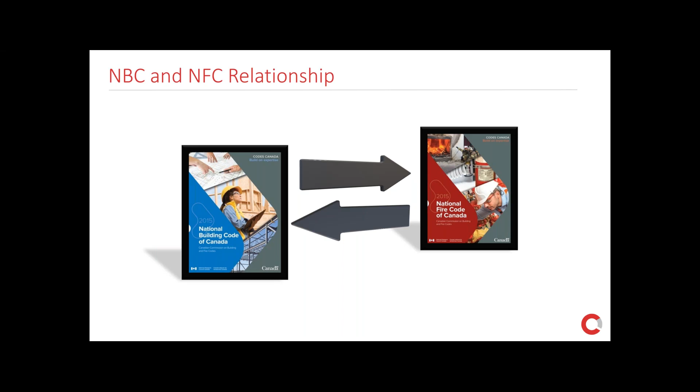between those two codes. But one important note, the NFC also prescribes requirements for existing buildings, i.e. sprinklers, that may be required in a hazardous process or retrofit for residential properties.

So how do codes relate to failures? So obviously there's a lot of questions, so many questions. So some of these typical questions. So does this building require sprinklers or other suppression system? Pretty typical. How about a fire alarm system? Was a fire separation even required? Who is responsible? So sometimes, not typically asked, but may be relevant.

So were these suites legal and did they meet code? What were the hazardous processes and did they meet code requirements? What is the code requirement for partially occupied suites? Fire at construction or demolition sites, were they required to follow a code to ensure fire safety? Interesting. These are all only some questions that have been or could potentially be asked. Each failure often requires that the fundamental code review be completed first.

Does the building require a sprinkler system? Good question. Let's start with the age of the structure and what code may have been used at the time of construction. Or maybe it's a fire code requirement to retroactively install the sprinklers. For example, flammable combustible material storage in a warehouse that may have exceeded the quantity allowed by code without a sprinkler system.

So, example of building and fire code application. So let's take a look at the application of the building and the fire code as it works together. So what do we do now? In this example, we are going to take you on a journey into the complexity of code interpretation and its usefulness. Assume that a fire occurred and spread beyond the area of fire origin. Origin and cause investigation has been completed and the cause was a result of an unattended fire that was accidentally left on. Fire damage was extensive to the restaurant and smoke propagated to other major occupancies.

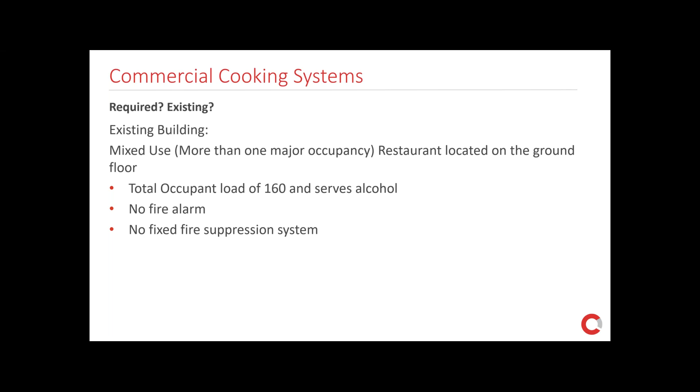So as we can see here, we have an existing building. It's a mixed use. We have more than one major occupancy, but the restaurant is located on the ground floor. The total occupant load is 160 and it serves alcohol. There's no fire alarm. There's no fixed fire suppression system. So where do I start? That's a pretty good question, right?

It's an existing building. So according to the previous slide, we have to look into the National Fire Code, right? Because it's existing. So the NFC 2015 edition is being used because it's currently regulated in multiple provinces. Okay, so some provinces might have an earlier, some might have a later. A lot of them use the NFC, at least as an adoption for that particular province or territory at this time.

So Article 2.6.1.9, Sentence 1, provides a pretty clear intent that we are to follow the National Building Code. Interesting. So the fire code is actually telling me now to follow something that's new, but it's not. But then again, remember, they work as harmonized documents together, right? So let's take a quick look at what the National Building Code has to say about commercial cooking.

So here the NBC, remember the National Building Code, Article 3.3.1.2, it's right here. So sentence 2 is always pretty clear on its intent, but yet again, it's making me look into other parts of the code. So this is a normal process within our codes, and also one that confuses many people, resulting in misinterpretation. I should have highlighted that one for you because there is a lot of misinterpretation. I'll break down each article for the purpose of this webinar.

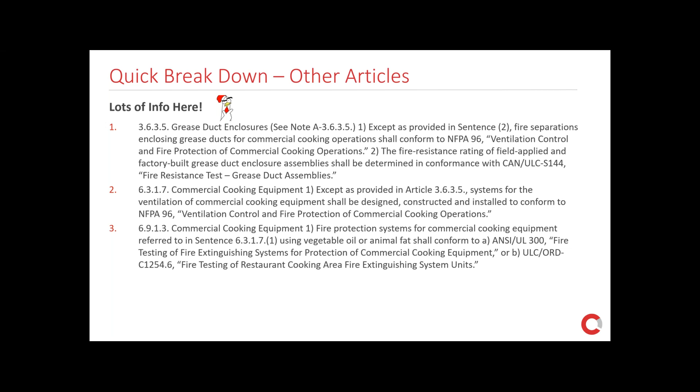So number 1 provides acceptable methods on how to install a fire separation around the exhaust duct. Pretty clear. Number 2 outlines how to install a ventilation system to NFPA 96, and we'll get into that in a minute. And number 3 requires you to use a fire extinguishing system. Very interesting.

So last step is to look at the acceptable standard as permitted by the regulation, which is NFPA 96. So here we have the National Building Code 2015 edition permits the use of NFPA 96, 2014 edition, again, depending on your province. So please note that certain provinces may already incorporate different editions of NFPA. So for instance, Alberta is NFPA 96, 2017. And Ontario still uses NFPA 2014.

So the question is, can I use a standard of an earlier edition? Well, the answer to that is no. Can I use a standard of a later edition? Maybe. If you're designing a system, then of course you can, depending on the authority having jurisdiction. So typically a newer standard may provide a clearer intent on particular articles or add content to help address specific concerns in the industry.

So for example, mobile and temporary cooking operations, i.e. the fry truck that you love to go to at lunchtime, were added to the 2017 edition of NFPA 96. So prior to that, there was really no mention of those mobile and temporary cooking operations. Many municipalities always had problems with them, but now it's being put into 96 to address it, 2017 and going forward.

So that's how these standards incorporate more of an understanding going forward, and they provide that clear intent. So just because you're regulated for older, using a newer one could provide that clear intent that a lot of those municipalities may require to have an understanding of why you're doing what you're doing, okay?

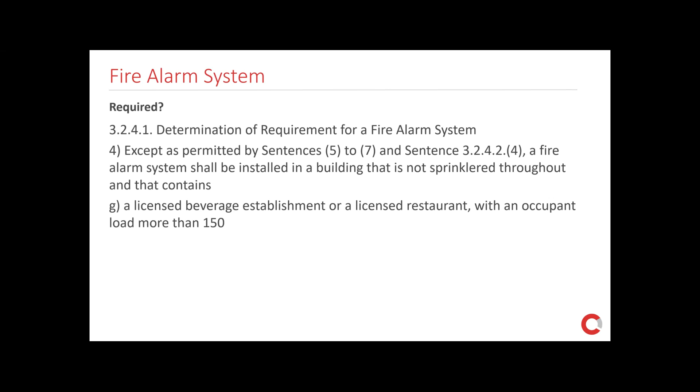Okay. In these particular cases, the answer is sometimes not easy, especially depending on what jurisdiction you're dealing with. Gathering the right info can provide answers and clarify what may or may not have been required and how the fire damage could potentially have been reduced.

So let's look at a little case study here. Okay, so this one's going to revolve around the fire protection, fixed fire protection system.

So since we discussed when a fire protection system is required in a commercial kitchen, I want to provide a little more in-depth analysis on fixed fire suppression systems. Okay, kind of makes sense since we already touched base a little bit on one already.

So the pictures depicted are from an investigation conducted at a restaurant that had a fire within the plenum and exhaust duct. Prior to the fire event, the restaurant manager had begun to start up all the appliances, as was the norm before they opened for the day. One such appliance that they were using was a tandoori oven. This tandoori oven in particular used solid fuel. So that's wood, charcoal, and such, rather than natural gas.

The solid fuel that was used was rarely emptied and never extinguished at the end of the day. So to reignite the fuel, they would add more wood and stir the smoldering contents. Remember, never extinguished, so that thing was smoldering all night. To ensure ignition, they used an igniter fluid. While they were preparing for the day, a fire occurred inside the exhaust duct. The manager immediately contacted 911 and fire crews arrived shortly thereafter.

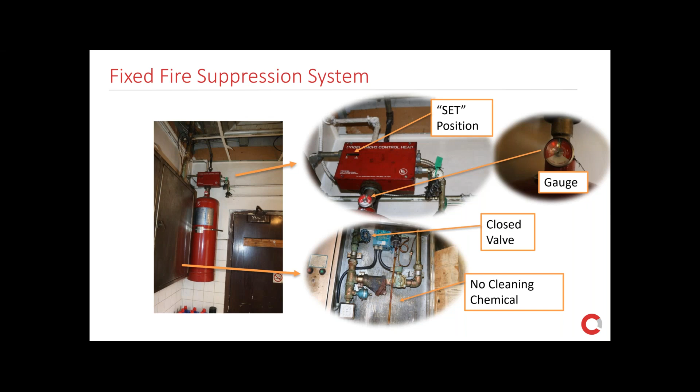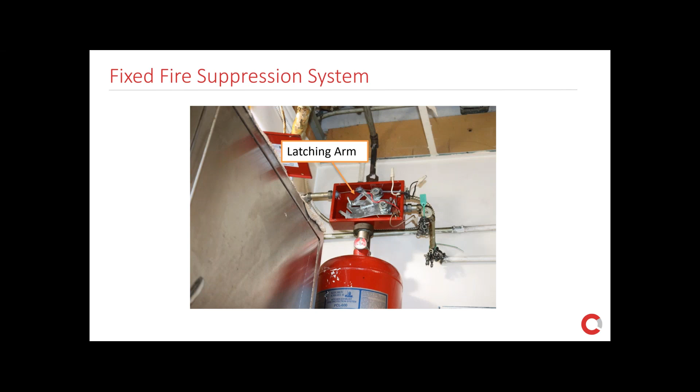So nozzles were located outside the hood, protecting most of the appliances. But by most, I mean some nozzles were missing, of course. Inside the hood, there's a space which is called the plenum. NFPA 96 requires that this space is protected along with the hazards, aka the appliances and the exhaust opening. When examining the plenum space, nozzles for the water wash were discovered, but no nozzles for the fixed fire protection system. So NFPA 96 clearly indicates that a listed water wash can be used for fire protection, but must be activated on an alarm condition.

Well, if I have no nozzles for the fixed fire protection system, it doesn't take a rocket scientist to see that, well, I got water wash, and that was shut off. Now I have a bit of a problem on my hands, right? Remember, in the prior pictures we saw wires inside the control head. Well, that's pretty interesting. Now, how about the activation? Well, this isn't an activation.

So detectors were located outside the plenum space, but how about inside somewhere? In short, a detector is required to be located at the exhaust opening. Okay, so we'll get into that in the next slide. So here you have your detector line that runs through. This ran on the outside, and we have a water wash nozzle that you can clearly see on your left. Okay.

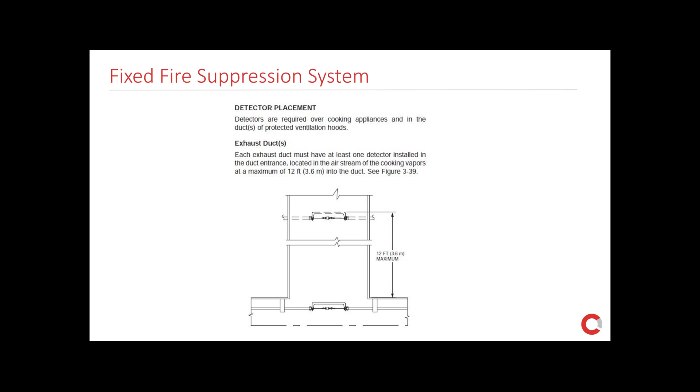So even if the system did trip and there was a detector, we still don't have an active water wash system in there, which means you get all that chemical on the outside in the appliances and still nothing on the inside. So the last thing to think about is, how did this fire happen? Well, what is common with solid fuel cooking? Pretty obvious, right? Embers being produced can ignite flammable substances. In this case, our substance was grease mixed with creosote, and a lot of it.

NFPA 96 is very strict when it comes to cooking with solid fuels, as you can see why. They have to have their own hoods and exhausts. This limits grease mixing with creosote. They need a spark arrestor. I wonder if this may have been a problem here. They need a fixed fire suppression system designed to adequately suppress the fire as well. I can tell you that all three items were not included.

On many occasions, these types of fires are preventable, and if installed and maintained, they will suppress the fire immediately, leading to minimal loss and cleanup. Most places with a properly working system will be up and running within a day. So imagine that you have a fire; in that same day, you can have a cleanup and get everything back into order and get working again.

After the examination was completed, the following is a list of deficiencies that would have prevented or at least suppressed the fire. Water wash system was shut off, and its primary design was to not only wash out grime, but also to act in conjunction with the suppression system. A lack of detector in the exhaust opening had caused the fire to go undetected, including not activating the fire suppression system. The tandoori oven installed under a hood was not designed for solid fuel cooking operations, and for lack of a listed spark arrestor to inhibit an ignition source from reaching the fuels.

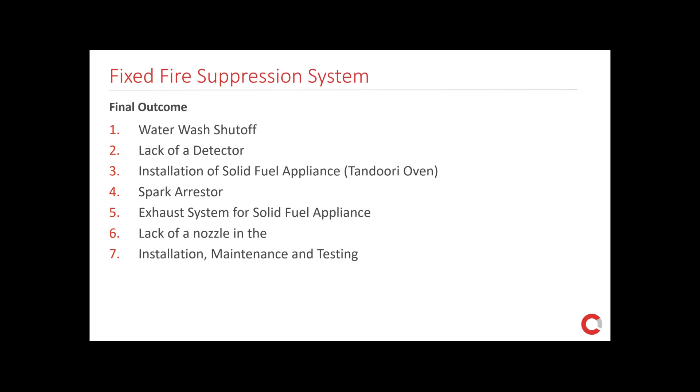And 7, owner was responsible for any installations taking place on the system, contractor responsible to ensure the system operates as intended, or provides a tag on the system that notifies the local AHJ. The responsibility for the inoperable system stems on who was responsible for what specific component leading up to the failure. So, who is responsible for code compliance? Well, owners, general contractors, developers, contractors, property managers, tenants, landlords, etc. So, all the above.

Responsible person and/or corporation: each province or territory may have their own version of this, but in the end, it all comes down to what person or corporation had control of the system leading up to the incident. How do we define owners? Well, Ontario Fire Code: unless it's specified otherwise, the owner is responsible for carrying out the provisions of the code. Ontario Building Code: owner includes, in respect to the property where construction or demolition will take place, a registered owner, lessee, or mortgagee in possession.

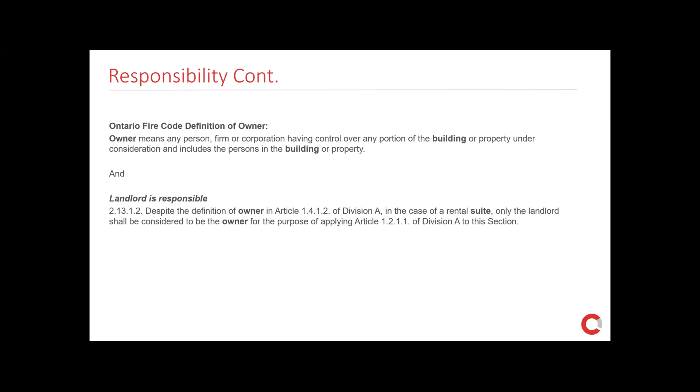What about contractors or property managers? Interesting. Contractors have care and control over the portion of the system or thing that they were hired to maintain, check, test, inspect, or install. Overall, owners are held responsible to be in conformance with the code, but as stated earlier, a responsible owner may not have had a responsible property manager, contractor, etc.

So how about the Ontario Building Code? An owner is responsible for obtaining a permit, and that includes a lessee or a mortgagee. If a contractor completes work in the building without a permit, the owner is still held liable for the work being done without a permit, but the contractor can also be held liable for commencing work without a permit. A general contractor hired by the owner can be held accountable for allowing work to commence without an approved permit. A lot of stuff here, right?

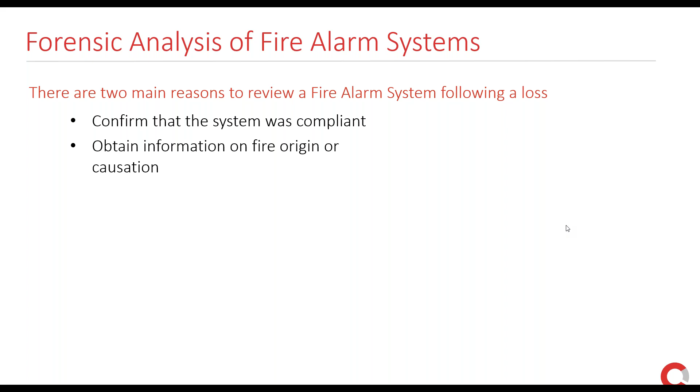A fire alarm system can also help us obtain information on fire origin and in some cases causation. So I will try to address both of these angles as we discuss the various aspects of fire alarm systems. But let's take a short step back first. We should talk about what constitutes a fire alarm system and how they're usually installed. There's a lot of material to this subject. We don't have a huge amount of time, so I will try to stay high level. If there's any questions that you want to drill down to at the end, we can do that.

But a fire alarm system is an electronic system that's installed throughout a building, designed to detect a fire condition and to notify building occupants of that condition. It is considered a life safety system in that it facilitates a building occupant's escape from a life-threatening situation.

Next main idea is detection. A fire alarm system needs devices around the building to determine that a fire condition exists. These devices can be automatic detectors, things like smoke or heat detectors, automatic sprinkler heads, which essentially are heat detectors in themselves, or manual devices like manual pull stations.

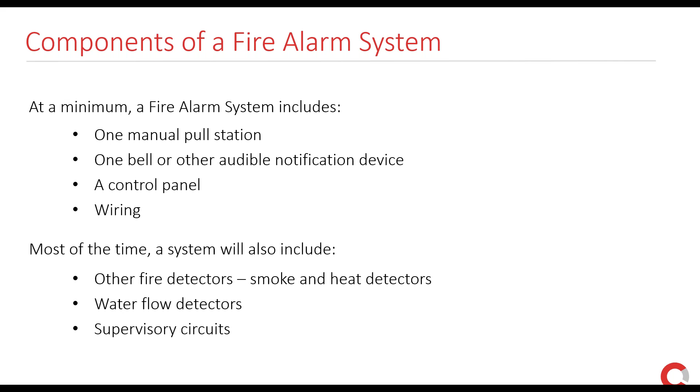So almost another component of fire alarm systems is the regulation. The fire alarm in Canada is regulated through multiple codes. Firstly, there's the building code, which mostly discusses what devices need to be in what kind of spaces. There are also ULC standards, which are referenced in the building code. But these mostly discuss how the devices should be installed and what capabilities those devices need to have. And then the Canadian Electrical Code has things to say, mostly about the wiring of the system. All three of these standards together do form the body of regulation for fire alarm systems.

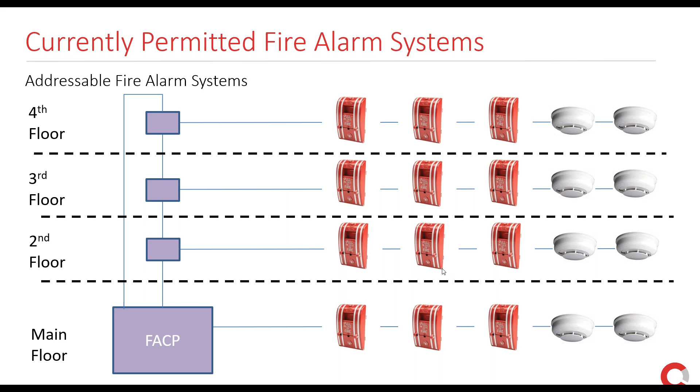But obviously, these two fire alarm systems do have very different capabilities. But it is likely that both of them are legal and compliant with the requirements in force. So some simple code research would suffice to determine what fire alarm type would be acceptable. As Clinton talked about, you do have to follow all of the threads of the code through, read every article that's referenced. You have to go through the whole process in order to make that determination.

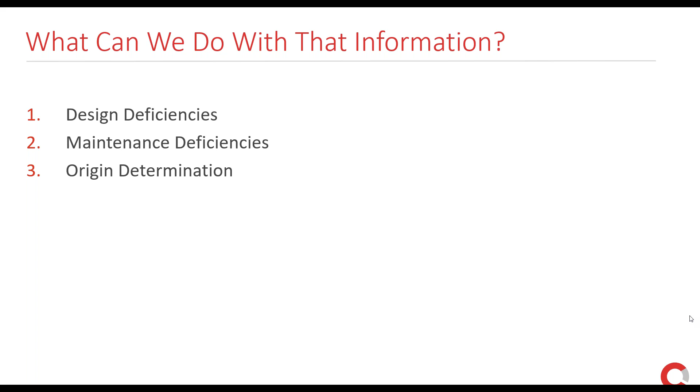Thirdly, the information gathered from an addressable system can help us with determination of fire origin, which of course can contribute to a causation determination as well. And any piece of information that helps us refine our origin and causation determinations can open other avenues of subrogation or liability defense, as the case may be.

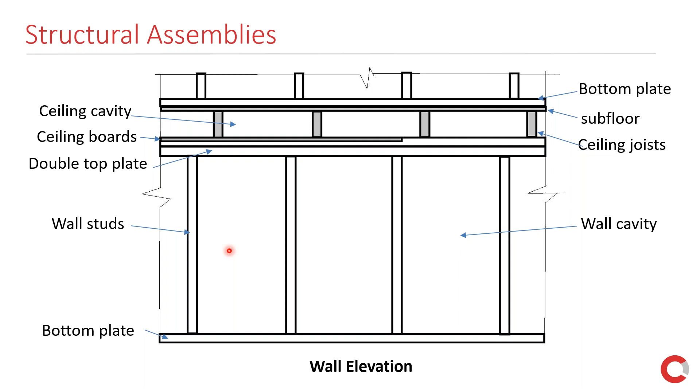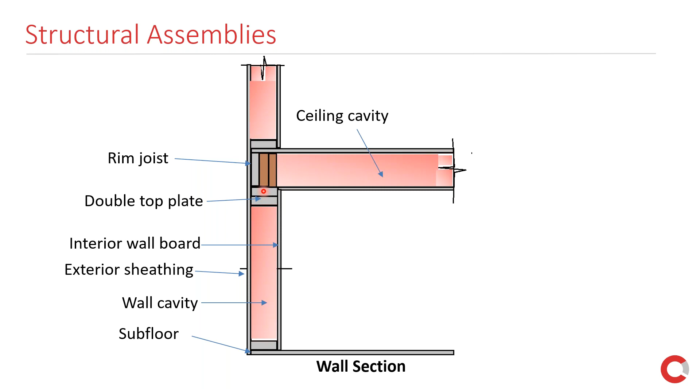So again, here a wall section at the exterior of the house. This is at the bottom plate of the wall. Here we have the studs. If you remember, they were usually spaced at 16-inch. And here, where it's shaded red, it's the cavity. Here's the floor joists and the cavity in the floor joists, and this is the wall above. And we have the top plates of the wall below and the bottom plate of the wall above.

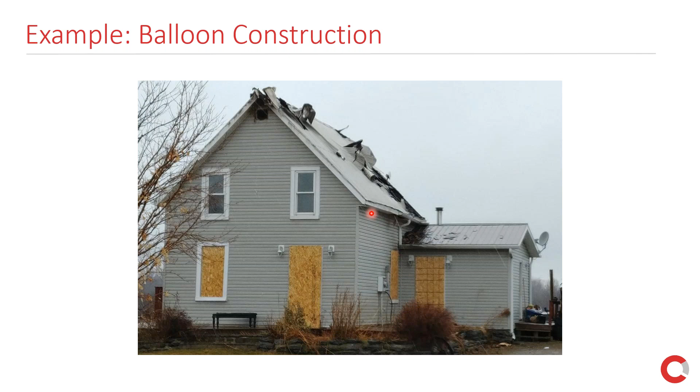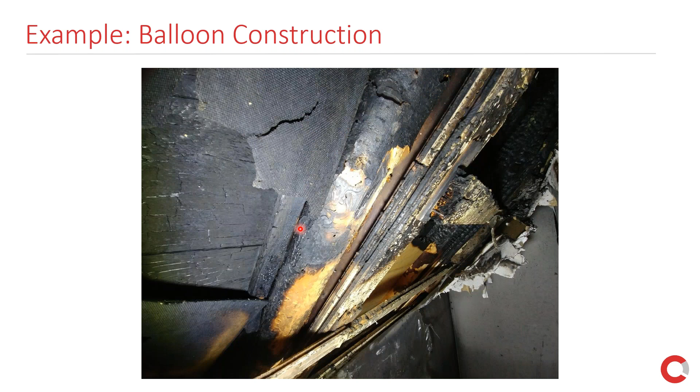And this is an example that we had. It started as a small fire in the basement, and as I said, it engulfed the entire house just because it was balloon construction, and all the wall and floor cavities were interconnected. You can see all the floor framing is charred here, and it got into the attic here, and this is inside the wall, and this is inside the attic.

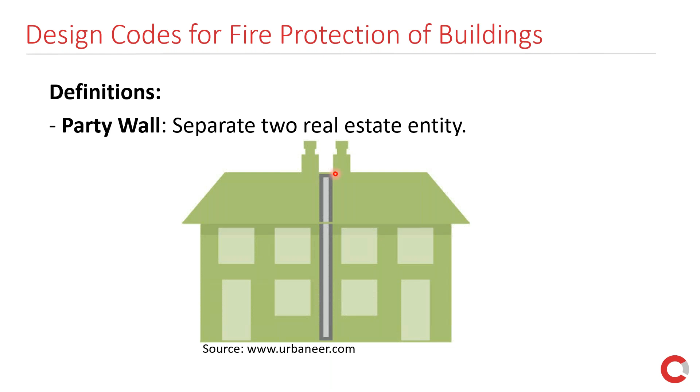So just a small fire from the basement, it consumed the whole house, and now it has to be rebuilt. You can see a general view of the fire damaged house here. Some more definitions. Party wall, it separates two real estate entities.

And fire separation, it's a wall that resists fire without collapsing for a certain amount of time, and that amount of time depends on the function of that wall. Is it between two residential suites? Is it between a residential suite and a hallway? Is it between two office spaces or commercial spaces? So the function of that wall is very important. Is it just a partition wall within one suite, in which case it doesn't need to be a fire separation.

And as you can guess, the more important the function is, the higher should be the fire resistance rating, which means it should resist the fire for a longer time. Now, firewall is a type of fire separation, and it should comply with certain conditions, and one of them is that it should not collapse if adjacent structural frames collapse under fire.

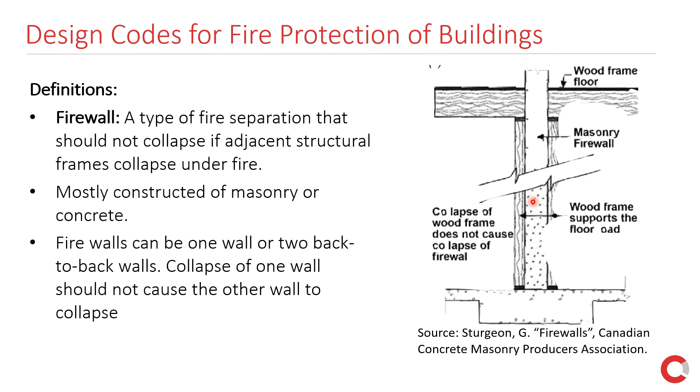For commercial and high hazard units, the firewalls must be non-combustible, but for residential units, it does not have to be, but it's mostly masonry and concrete, just commonly. Now, fire resistance rating, it's how long the structural assembly can withstand the passage of flame and transmission of heat. Usually it's between half an hour to 2 hours.

And flame spread rating is how fast flame can spread across a material compared to red oak. Usually it's between 25 to 200, and this is 25% to 200%. So 200% means it spreads 2 times as fast as it does across red oak. So the higher the number is, the faster it spreads, and it's less desirable. For red oak, of course, it's 100%.

Fire stop is the materials to fill gaps to provide the required fire resistance rating. When you have penetrations in fire separations, you need to fill that with fire stop. And fire block is material to block spread of fire in ceiling and wall cavities. As I said, you cannot have a super large amount of cavity, and they should not be interconnected. So there should be blocks to prevent spread of fire.

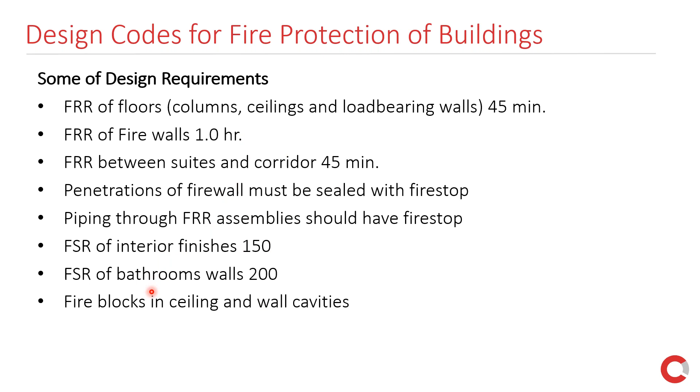And FSR of interior finishes 150, FSR of bathroom walls 200. FSR is flame spread rating, and fire blocks should be installed in ceiling and wall cavities. These are just an example of the requirements of the code for residential units. And now we are going to look at some examples here. First of all, protection of soffits.

Soffits must be protected if connected to an attic that is over multiple units. So if it's a common attic, the soffits must be protected. Now here I add that even if it's just a single family house, it's recommended to be protected. I'm going to tell you why. If you remember the section of the house here, and you have a soffit, by the code, it doesn't need to be protected if it's a single family house.

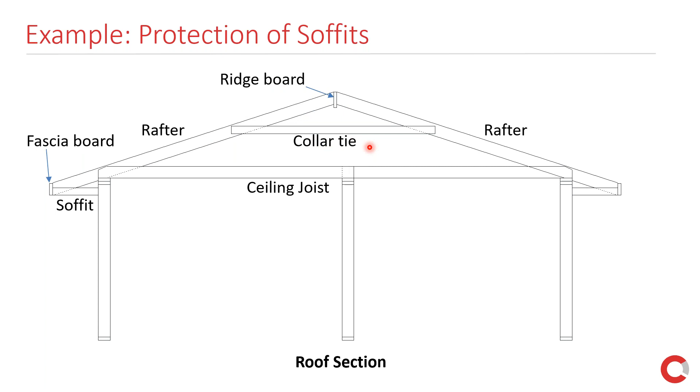In that case, what happens is if there's a fire here, from the soffit it gets into the attic, and from the attic it burns all the rafters and engulfs the entire house. And in that case, most of the time, you need to rebuild the house, or at least the top floor of the house. And we had one example like that. A large house, a split level house, and there was a small fire on the balcony, and it got into the attic.

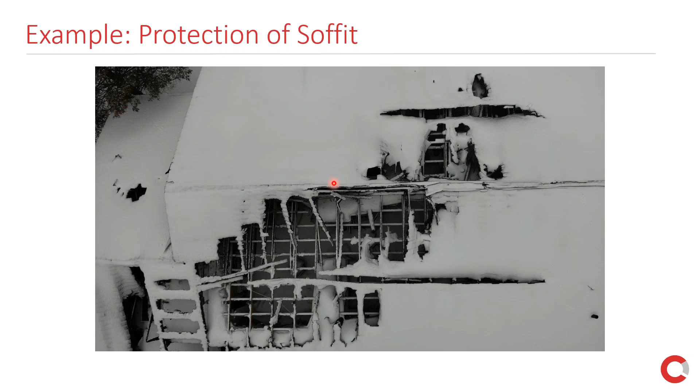Protection of balconies. So there was another fire where the fire started at the balcony of the lower level, actually the lower apartment, and from there it got to the balconies. The balconies were not protected, and the soffit was not protected. So not only did it spread to the upper apartments, but it also got into the attic, and from the attic to multiple units.

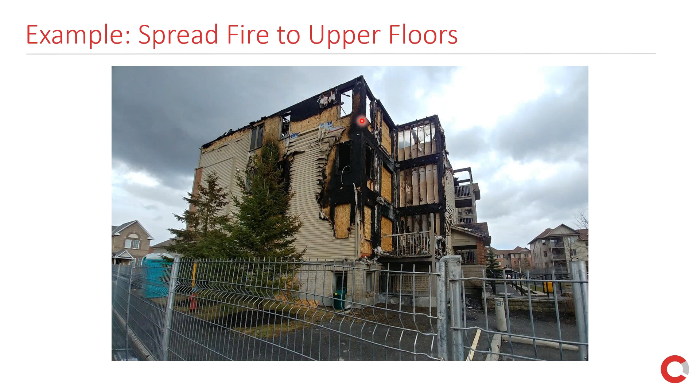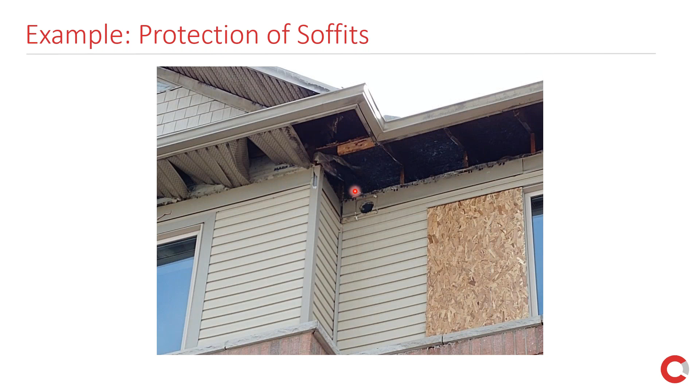Now we are in a situation where they have to rebuild at least an entire block of that apartment unit. Here is the view of the soffit, unprotected soffit.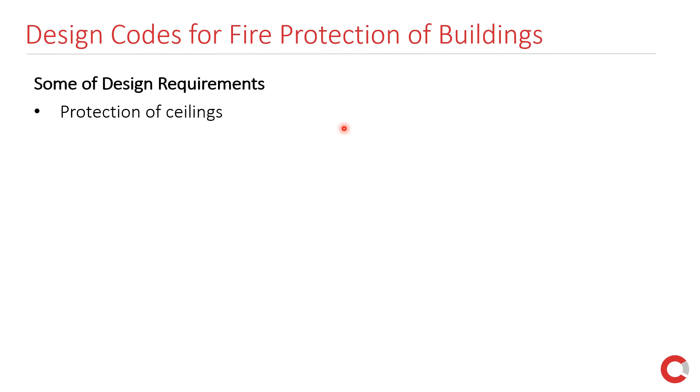Protection of ceilings. As I said, floors need to be fire separated, but it's not required for single family dwellings. And again, it is not required, but it's highly recommended. And when it comes to floors, lumbers have higher fire resistance rating compared to TJI joists. And it's because it's a 1.5 inch thick solid wood. So even in case of fire, the outer layers get burnt, and that outer scorching actually protects the inner core of the joist.

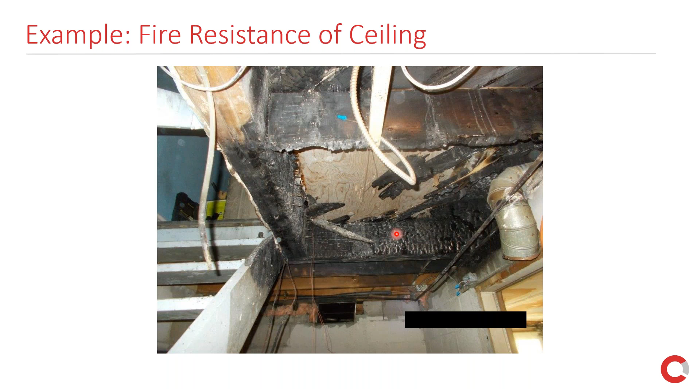So this is one example. The charred layer of the joist is actually a fire protection for the inner core of the floor joists. But when we have TJI, the web of the TJI is just a thin OSB, and it can easily burn out, and when that's burnt out, the entire floor loses its load-bearing capacity. So especially when there are TJI units in houses, we strongly recommend finishing it with gypsum boards. It's not required by the code, but it's highly recommended.

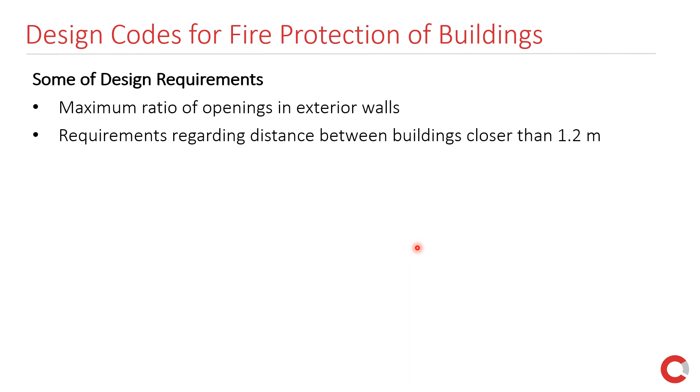And there are design requirements also for the maximum ratio of openings in exterior walls if the distance of buildings is closer than 1.2 meters. And the idea is that the fire should not spread from one house to the other.

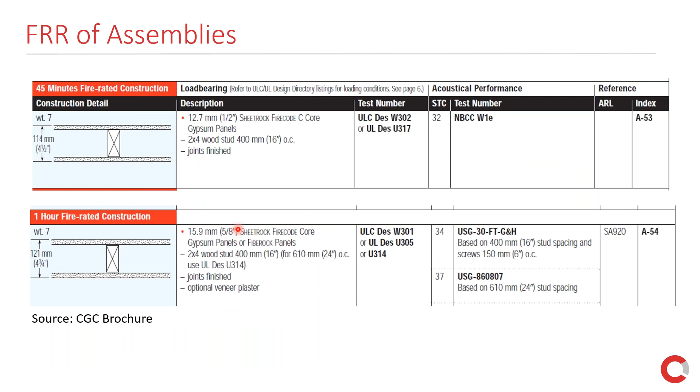And fire resistance rating of assemblies are derived from Underwriters Laboratories of Canada and tested in accordance with ULC standards, and are given in tables. So we use that to determine if the fire resistance rating of assemblies is sufficient or not. If they're not sufficient, then that would be a pre-existing condition.

So that was just one example of the tables that we use. One important thing I should mention is that the firewalls and fire separations must be continuous into the attic and into the mansard roofs. And if it's not continuous, it's a deviation from the code, and it can have very significant consequences. And for old houses, for old units, we have seen many times that they were not continuous.

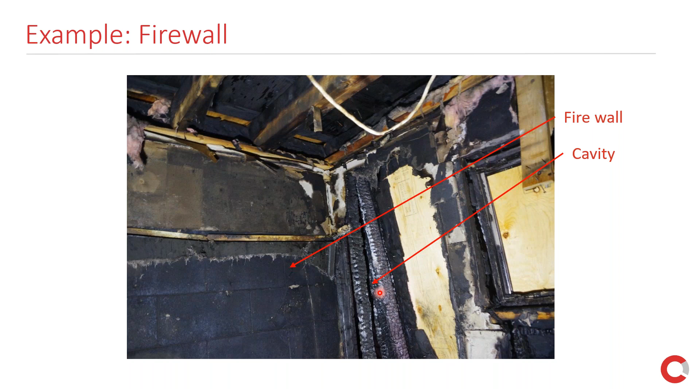And in this example, the structural drawings specified that the mansard roof must be protected by fire-rated gypsum boards, but in construction it was not complied with. So it was a pre-existing construction deficiency, and so the fire just spread. So this is a view of the firewall and the floor joists. The fire just spread through the mansard roof to the other units.

So in summary, in Ontario, Ontario Building Code 2012 must be followed. Of course, in other jurisdictions, you should follow your local building code. It's very important to protect soffits, ceilings, walls, and columns as per the requirements of the code. And it's important to make continuous fire separation as required by the building code, and seek structural inspection, especially for old buildings, because a lot of times there are construction deficiencies. Like I said before, the firewall was not continuous in our last example.

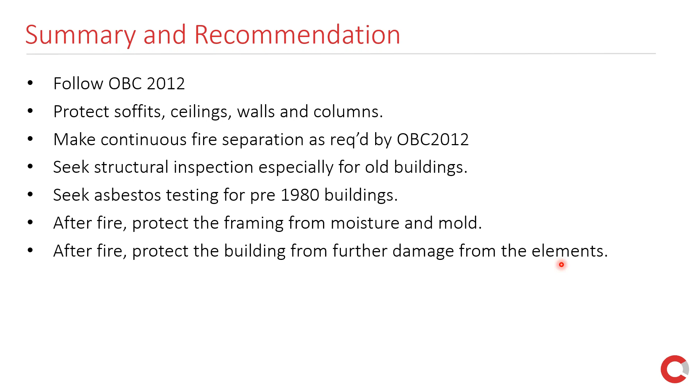So seek structural inspection for old buildings, and of course seek asbestos testing for pre-1980 buildings. It's safe to assume that buildings before the 1980s all have asbestos. I've seen workers a lot of times go into these buildings without protecting themselves. After fire, protect the framing from moisture and mold, and protect the building from further damage from the elements, from snow or ice and stuff.

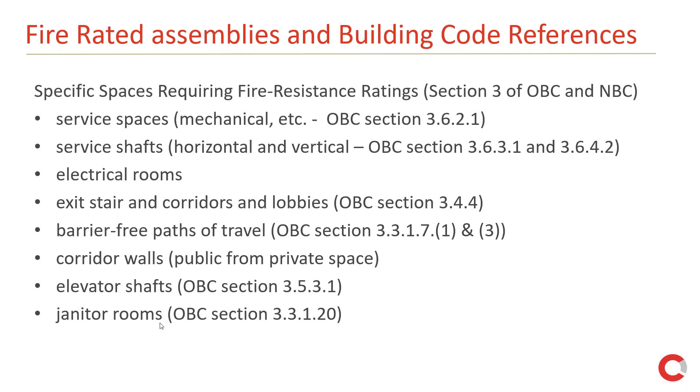So Part 3, the different sections cover things like service spaces, service shafts, electrical rooms, exits and corridors and lobbies, barrier-free paths of travel, corridor walls, elevator shafts, and janitor rooms. These are just some of the different areas of Part 3. There's other areas, but I just thought I'd highlight these.

Now remember, fire codes contain retroactive requirements that apply to all buildings, regardless of when they were built. Now, while the building code requirements only apply to construction assemblies at the time of design and construction, the fire codes are retroactive. And what that means is that the structure or building assembly must always meet the requirements set out in the fire code. Building code is only for when the building is designed or built. That's when the scrutiny is. With the fire code, it's always.

Now, this is also referred to in fire compartments and what we call compartmentalization of different areas of buildings to prevent fire and smoke spread. Now, fire separation is more specific to just describing the construction assembly that provides for fire compartments and fire separations. Now, fire damper is one of those systems in a firewall or a fire separation that accomplishes this in HVAC ducts or in wall and ceiling penetrations and closes the opening in the fire resistant assembly in case of a fire. Now, fire stop is a way of enclosing penetrations in fire separations and in firewalls and the like to make sure that the assembly is impervious to fire and smoke.

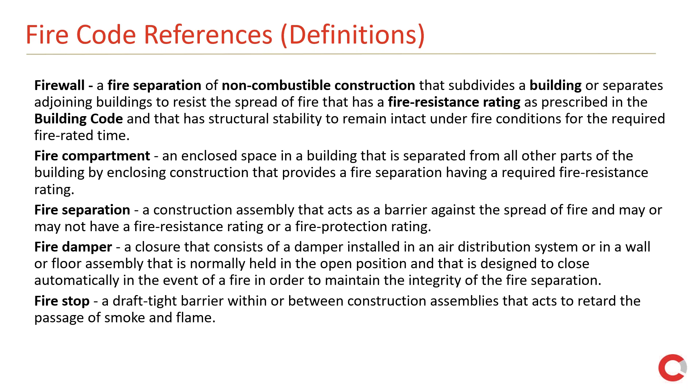Okay, so let's look at, this is section 2.2 in the fire code, and it deals with fire separation. So some of the rules, we see damaged fire separations. So this rule talks about where fire separations between rooms, corridors, shafts, and other spaces are damaged so as to affect the integrity of the fire resistance rating. The damaged fire separation shall be repaired so that the integrity of the fire separation is maintained. Now remember, fire code is retroactive, so all these fire separations must be maintained always.

Maintenance of closures. So these are all sorts of openings in fire separations, include doors, ducts, windows, pass-throughs. And again, the rule reads so that they should be maintained to ensure that they're operable at all times. And it's got a few examples: keeping fusible links and heat and smoke actuated devices undamaged and free of paint and dirt, keeping guides, bearings, stay rolls clean and lubricated, making necessary adjustments, repairs to door hardware and door accessories to ensure proper closing and latching. So that's talking about door closers and door latches, repairing or replacing inoperative parts of hold open devices and automatic releasing devices. So these are automatic door holding devices that will close in case of a fire.

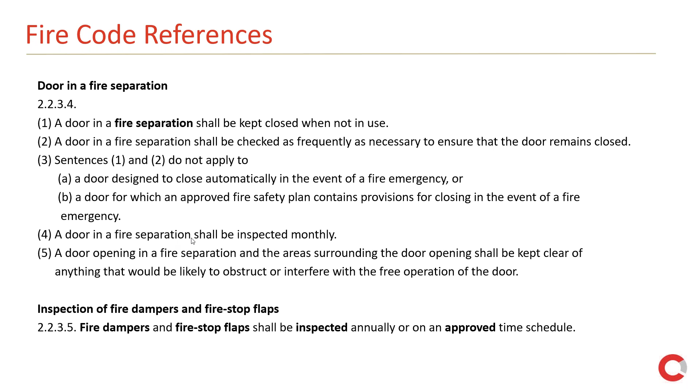Now, not only are these systems in place to reduce insurable loss, but also for life safety. In this case, the fire occurred outside of the school day, so there was actually no threat to life. It occurred in the evening, and actually this one occurred during COVID. Now, we're going to look at some of the penetrations in the firewalls, as the adjuster in this case knew that there was extensive damage that spread the fire more than it should have, and he wanted to know from us why there was so much smoke and heat damage outside the fire origin area.

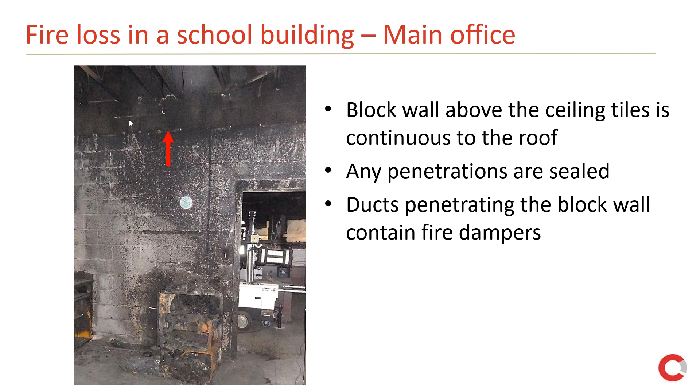Now, here's the same room. The arrow points to where the suspended ceiling was, the drop ceiling. And above the ceiling is where you have all your structural assemblies. You can see the open steel web joists. And this is actually where we find some of the issues. So what we look for is that the block wall, which is the fire separation from the office into the corridor, is continuous, and any penetrations in the block wall are sealed. Now, you can imagine ducts will penetrate the block wall. So what we look for is fire dampers in the block wall penetrations for ducts.

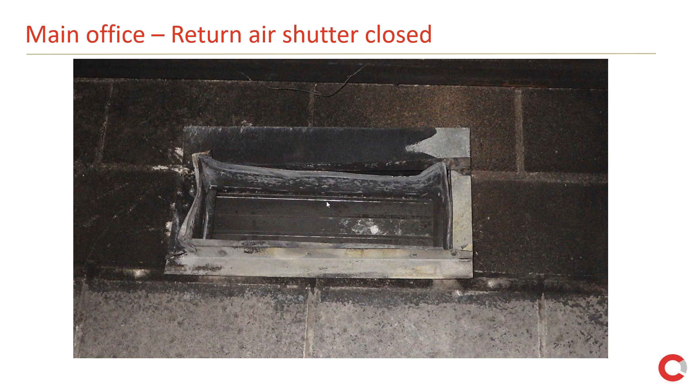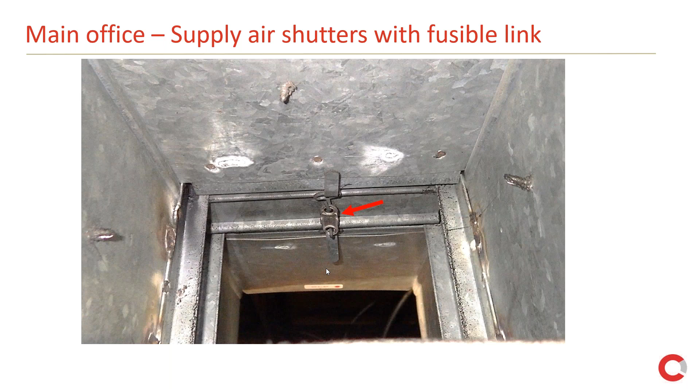So here's two similar assemblies. In this case, the shutters stayed open. You can see that the fire didn't originate in this room, but it's close to here. This is another part of the office that didn't see as much fire damage. And as a result, the heat wasn't intense enough to set off the fire dampers in these penetrations. Here's a close-up of the air shutter that remained open because the fusible link didn't see enough heat. In this case, this fusible link is set to separate exactly at 165 degrees Fahrenheit.

So here's an example of a fusible link. We have two components. You can see the separation here. They are adhered together by material, sometimes an alloy, that lets the two ends with the loops separate at a set temperature. In this case, it's 165 degrees. It is certified by a third party, in this case UL, Underwriters Laboratories, and it is approved and tested to ULC standard 33, which is the standard for safety heat responsive links for fire protection service devices. In this case, this one is to be utilized for fire dampers.

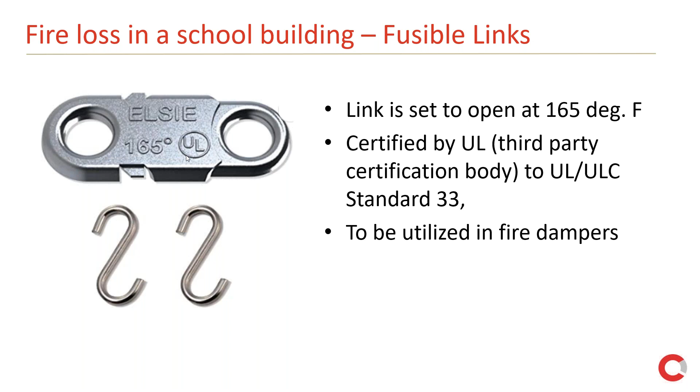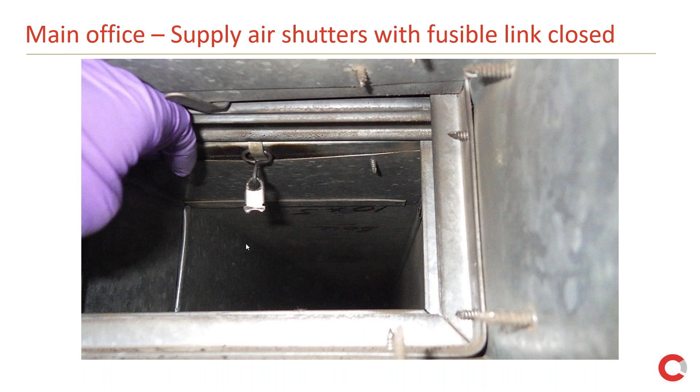It does lift up, it does operate, it closes by gravity, so it is a mechanical device. And in this case, you can see the fusible link that's separated from the other side. So similar arrangement was over here, and as the heat of the fire separates the link, the shutter closes, as you saw in the previous slide. And that goes to stopping the migration of fire, smoke, and heat through the assembly and through the HVAC ducts.

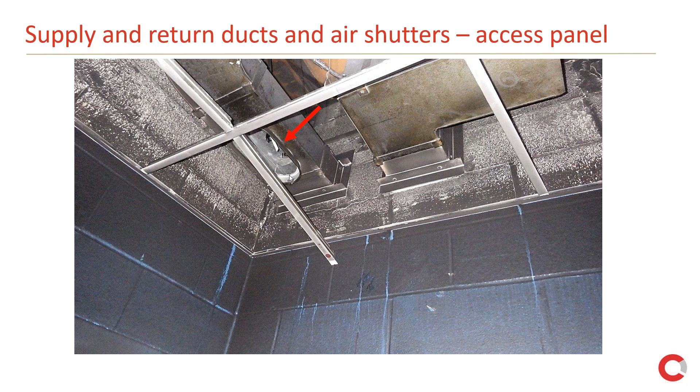Now, a proper installation for a fire damper with a fusible link will also include an access panel. So here we have an access panel in the duct. And it is a way for us to actually inspect the shutters and the fusible links. And here's a close-up of an access panel. You can see the gasket that seals the duct to make it airtight. And the access panels are required to inspect and maintain the air shutters and the fusible links, which need routine replacement.

Now, because they're under tension when installed, if they're not replaced as scheduled, there is metal creep within that fusible link that may cause them to release without any heat exposure, or they may actually change in the activation temperature and release at lower temperatures than design just from being old. So they are to be replaced on a routine basis. I believe it's a yearly replacement schedule, but depends on the occupancy.

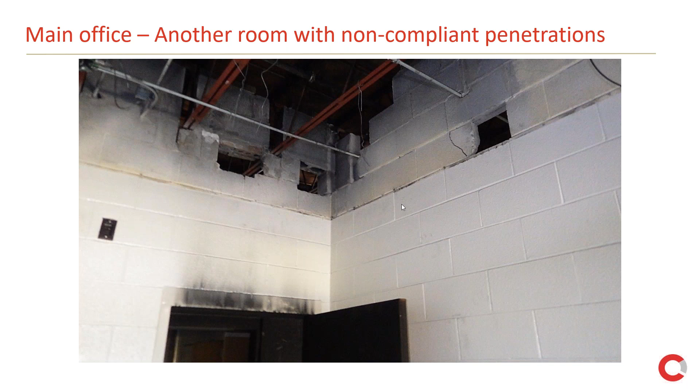Now, here's a room with non-compliant penetrations. In this case, there were probably ducts at some point in time that were removed, or during the original construction, there were plans for ducts here through the block wall, and it never materialized. Now you can see actually the firewalls are not continuous, and there's some blocks missing here again, which isn't a good thing for fire, smoke, and heat migration, should there be a fire. In this case, there was a fire.

Now, this air register had been removed some point in time before the fire, and this did cause heat migration from the office where the fire originated through the block wall and into the corridor. Now you can also see other penetrations here. You can see this pipe. You can barely make it out, but you can see that the block is actually still broken here. And electrical penetration. So here's an electrical box with some conduit. Again, the hole is much bigger.

So this is a case where fire stop material, such as intumescent caulking or even mortar, may have been used in sealing the penetrations for these. Although doing that with this bigger penetration would have made not much difference in this case.

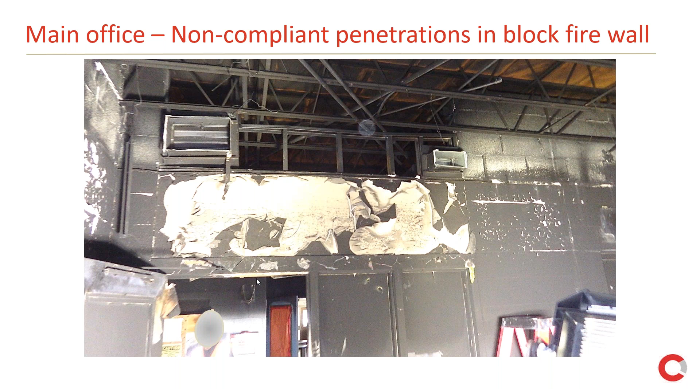Now this is looking from the other side. So this is from the corridor into the main office. So I'll go back a slide again. I'm standing out here in the second slide, looking back towards this assembly. You can see the two ducts that were in that assembly and the big opening above the suspended ceiling.

So you can see that once the T-bar ceiling went up, nobody knew any different. Nobody knew any better that there was this huge penetration, and it continued with a school within a school that was probably decades old and not fully compliant. So it's this blatant disregard of the building code and major penetrations in the block wall, which somebody disregarded, which may have resulted in loss of life or injury to life, were it to happen during the school day.

But you can also see how much it impacts the spread of smoke and soot. Look at all the smoke and soot on the walls in this case. That happened because our penetrations were not properly maintained.

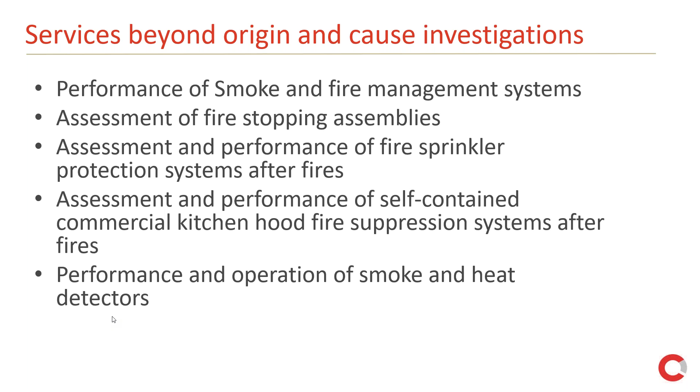So again, thank you for sitting through my presentation, and I will ask if there's any questions. Thank you, Val. Yes, we do have questions. I think we'll start with one that refers directly to the case study, since we just wrapped that up. Was the office door closed, and did it have a self-closer?

So there were several offices. I'm not sure what the questioner is asking, whether it was the main office door. In the case of the last slide, it appeared that that office door was slightly open because you saw some smoke coming out of that office door. And I can't recall if that one actually had a door closer. The other one that I showed in the first slide, it was missing at the time that I was there.

There is actually a special rule in school buildings about door closers. It's not very apparent in the fire code, but door closers are one way of closing the doors in fire separations. In schools, it's actually a written and said rule to everybody in the schools that they're supposed to always shut the doors. Not sure if that answers the question. Yeah, I think so. Great.

Here's a question around fusible links. How often do they need to be checked, who's responsible for that, and do they expire? They do expire, and I believe I said it was a yearly basis. Don't quote me on that.

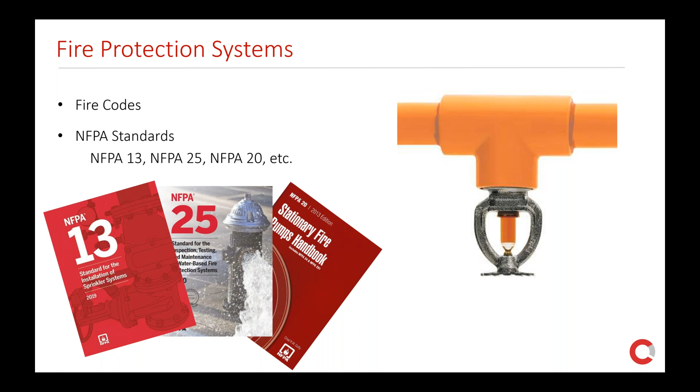So something to keep in mind when we talk about fire protection systems is that these systems or sprinkler systems are incredibly reliable. And whenever these fire protection systems are installed correctly and maintained correctly, they greatly reduce property damage. And whenever they are installed in a building, they reduce fatalities by about 90%, which is significant. And those statistics are great whenever the systems are kept up to date, because obviously the more damages, the more injuries, the more people affected, the more complex your claims are going to be, right? And usually the investigations as well.

And also remember that claims typically will result from systems that are poorly maintained, improperly designed, improperly installed. They can be abused a lot of times. And in some of the cases, there are some that have manufacturing defects, and those lead to those failures we see. Again, just to bring this all back to the spotlight, you've been hearing through this presentation that fire protection and life safety systems are pivotal in today's buildings, and that the integration of active as well as passive fire protection systems is essential for safety, for property protection, and that they must follow strict standards and codes.

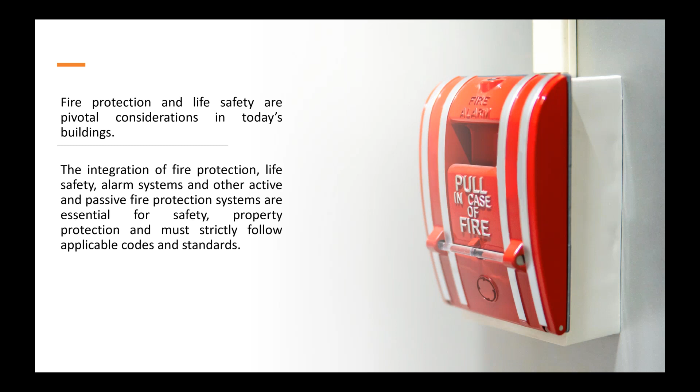In particular, the case of wet and dry sprinklers, as well as fire pumps, that's what I'm going to be focusing on today. And also looking beyond the point of origin, which will usually deliver the most results in the files that I typically handle. So whenever I have a chance to look beyond just the point of origin, or just beyond the root of the fire, then I can provide my clients with a lot more perspective and a lot more potential for their files.

So going into a little bit of detail on wet pipe and dry pipe fire sprinkler systems, I want to bring back that my colleagues presented about several other fire protection systems, and obviously the importance for life safety and property protection. But I just want to be focusing on these, which are the most common ones in buildings, residential buildings, commercial buildings.

So wet sprinkler systems and dry sprinkler systems, both of which have inherent advantages, and of course, every system has some disadvantages as well. As I was saying before, you will typically see a wet sprinkler system in your office, warehouses, apartment units, and most indoor structures. And here in Canada, because of the cold winters, we have dry systems that have to be installed in exposed areas, right? Such as parking garages, outdoor patios, and balconies.

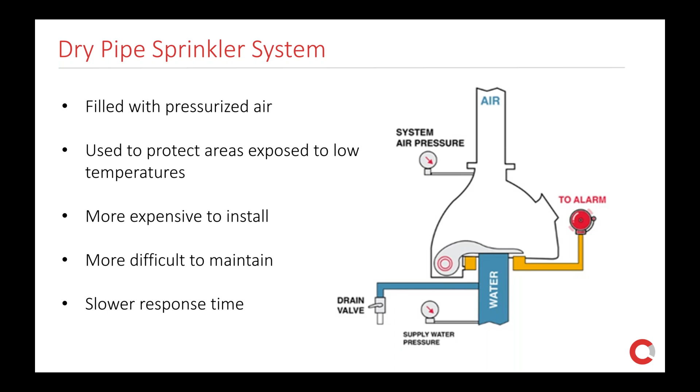Okay. Just very quickly, the anatomy of most sprinkler systems. There's the piping and different materials used, the sprinkler heads, and the pumps. I'm going to be also talking about pumps today. This is by no means an exhaustive list of components, but rather just an overview of the most likely systems or components to fail or sustain damage that lead to losses.

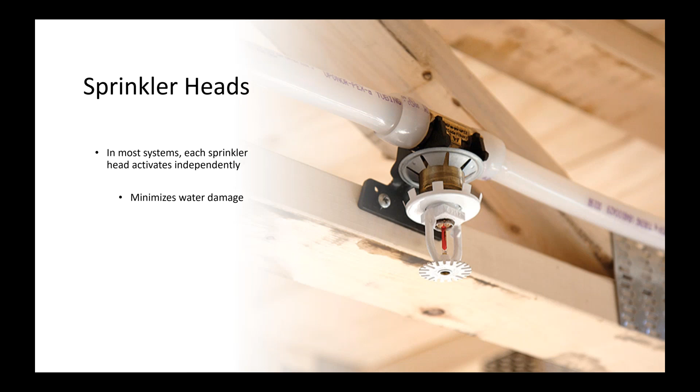Sprinkler heads, this is the most seen component in the systems, and they are activated independently, unlike in those movies where the whole floor goes off, and that helps control, contain, extinguish, or prevent the fire from spreading. Again, this is how they would look, and that water pressure concentration will help in the containment of the fire or extinguishing of the fire.

Again, for those of you who haven't had much experience with the sprinkler heads, just very quickly, there are two main types, I would say. One has a glass bulb filled with a liquid that expands with temperature and activates at a predetermined temperature. These ones are very particular whenever we look at self-activations, but these are very common nowadays and relatively very reliable. The statistics speak of one of these heads going off for no apparent reason out of every 16 million heads out there. So a very, very good track record for these systems.

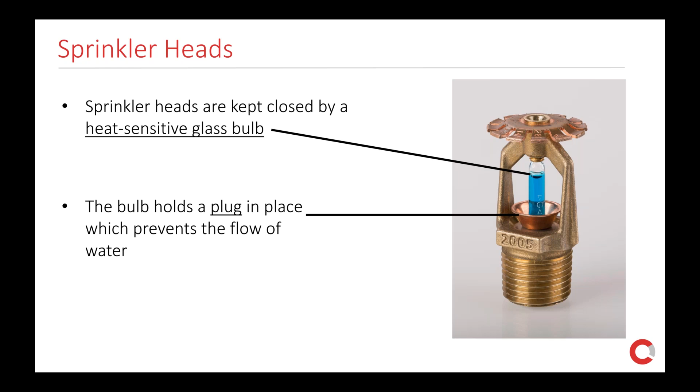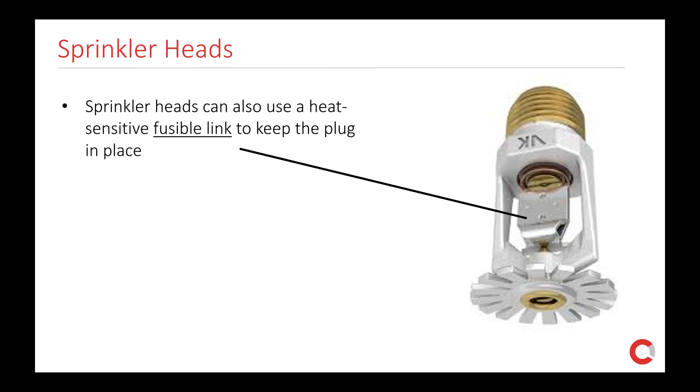The other type, as Val was saying, has more of a mechanical solder type fusible link that has an alloy holding two parts. Whenever the temperature reaches a certain point, it will release and activate. But again, let's just keep all of that in the back of our heads as we move through the presentation.

So now I'd like to go through some common causes of failures in sprinkler systems. And for that, I can mention a couple that are very interesting over the years. I've seen very interesting files, one of which includes damages caused by the occupant of the units. Obviously, we'll see cases involving improper installation, improper maintenance, and to be fair, there are a few out there that relate back to manufacturing defects. Mostly, I would say they can be addressed in recalls, but those recalls sometimes take time, as some of you may know, and obviously that time leads to other failures happening before they can be taken out of circulation.

Again, looking at occupant damages, one of the very common ones that we still see today, and we shouldn't really, is those people who hang whatever it is from the sprinkler heads in a hotel, or say in a commercial unit, there are some forklifts, some ladders, some sport equipment as well, say baseball playing in a gymnasium or in a residential setting as well.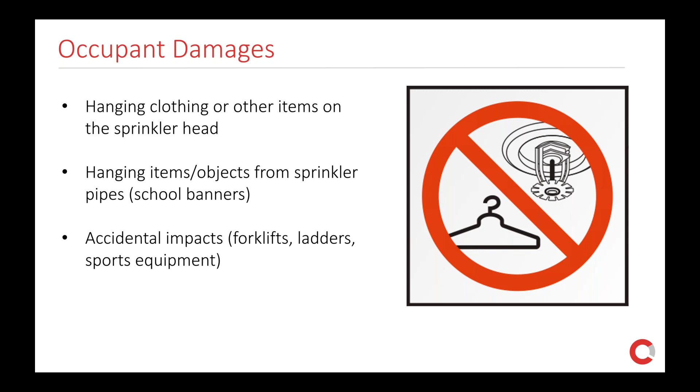And this is going to be one of my first case studies that I'm going to present. Just very short, but very interesting. It is a fire damage resulting from unattended cooking. And this is one of those where I'm sure many of you have had experience with. This is a relatively new building. It is equipped with a fire protection system, sprinkler heads throughout the unit. In this case, the unit owner left something on the stove and walked away.

I don't know how many times I've seen losses like this. I'm sure you have your stories about that. Lots for sure. And how many times have you had a good potential for subrogation out of these? I would say very few. It's typically human error. If it's not a tenant involved, then that's about it. Well, here's where not only the fire investigation for the origin and cause comes in, but the fire protection expertise comes in as well.

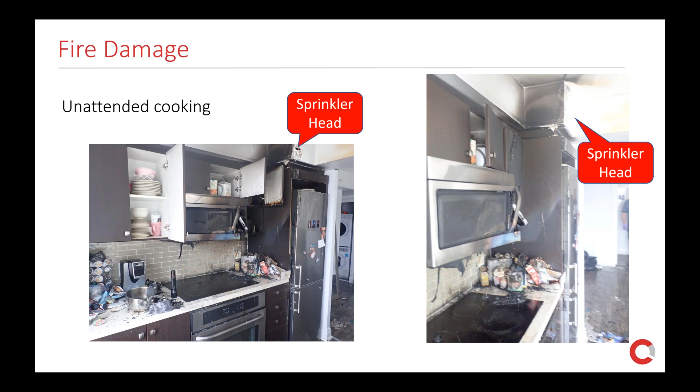And why? Well, because the spray pattern from the sprinkler head needs to be directed towards the fire. And in this case, it was clearly not the case. The fire had time to develop, and it caused much more damage than it should have. So working on this file, it was my opinion that the fire damage would have been lesser had the installation of the sprinkler head followed the requirements in the standard. Obviously, we have to remember that we are not able to prevent the fire. The fire was going to happen anyways, and some damage would have resulted from it.

So in the end, my client was successful in recovering from the builder and from the installer, I believe at least around 50% of the damages. That's what the settlement came up to. So from a zero recovery potential to 50%, that wasn't too bad, I think.

Okay, quickly moving on to some of the other issues, like improper installation of CPVC piping. And remember, I was saying before that CPVC or plastic pipe in fire protection systems is becoming more and more abundant in newer construction. And that's obviously because it's easier to install, is less expensive, and it can be repaired easier as well. But it also comes with its own risks. And one of those very common is that the joints are not properly made, and obviously some other more complicated issues that I'm going to be looking at in a little more detail in a couple of slides.

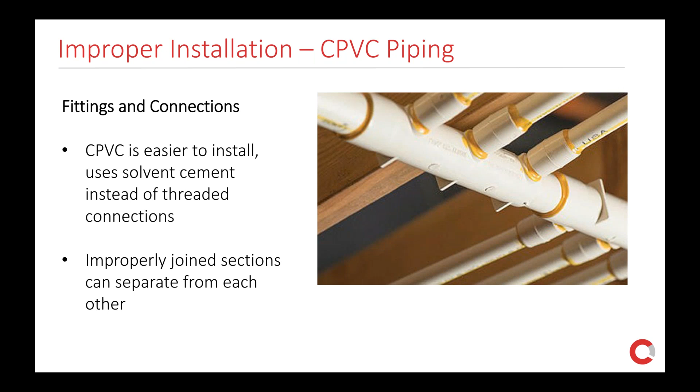So just a parenthesis here: many clients ask me if they can ship the evidence to me. And I usually want to attend the scene, of course, because I'm able to document everything I need. But I also understand that in a small number of cases and under the right conditions, it is possible to complete the investigation when you ship the evidence.

Now, this one in particular is a good example of a file where the client wanted to ship the evidence, thinking this had to do with freezing, and it was an easy situation for them to deal with and cover and move on. Now, I come along and I know that attending the site would yield the right information to process this evidence, to process this site, to better understand the failure.

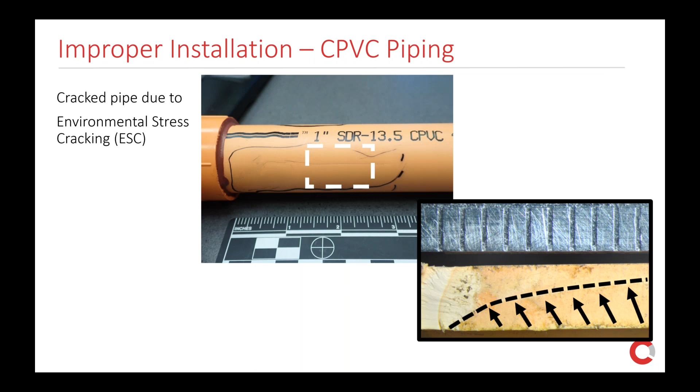So there's also the case of the wrong heads in the wrong place. And again, this does not happen too often, but when it does, there are consequences. In particular, when a lower temperature head is in a hot place, such as a restaurant kitchen, there is a high chance of it activating in the absence of a fire. Remember, the head is rated for, say, 155 Fahrenheit. There are heads rated for 265 and higher as well.

But most importantly, if a head of a higher temperature is installed in a place where it should have been a lower temperature, now we're not only causing potential for water damage, but we're also entering into the possibility of creating injuries or fatalities because the system did not activate when it was supposed to. And whenever I come in contact with a case like this, I always look at whether the space, this unit, had been repurposed.

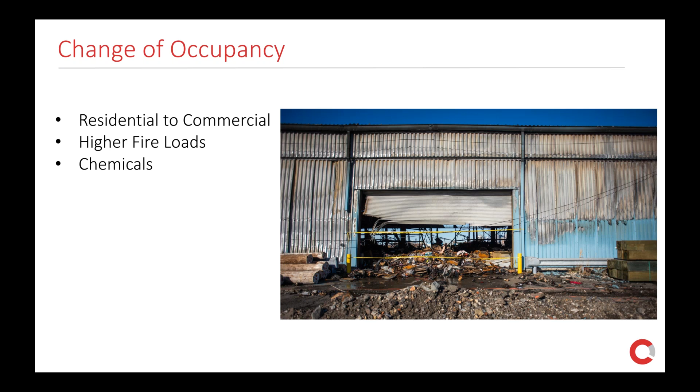Another case involving change of occupancy. In this case, it involved carpets that were stored all the way to the ceiling in this facility. And again, this is a prime example of a warehouse that was initially meant to hold a smaller fire load and was leased to someone who changed the occupancy without making the appropriate changes to the fire protection systems.

As some of my colleagues say, well, there is a responsibility for the owner, but also the code refers to the lessee, or the person or company leasing the property in this case, right? They should also be following the procedures. But unfortunately, some of the owners don't get away so easily because they have the ability to conduct some inspections every so often, and in many cases they don't, and things like this happen or can happen.

Just to finalize on wet and dry sprinkler systems, when you receive a sprinkler system claim, a couple of important things are to document the scene thoroughly. Remember that repairs to a sprinkler system usually happen immediately, either same day or the next day, because nobody wants to have the system down and a fire happen. And so don't wait until the next day. Just obtain as much information as you can. Start by asking about inspection, maintenance records, and whatever else you can.

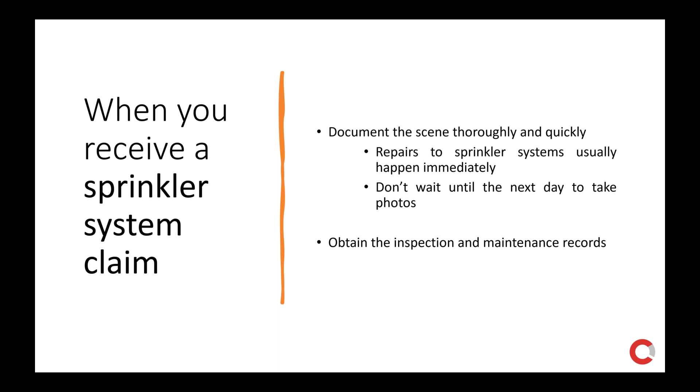So moving on to fire pumps, and this is a very fascinating topic, because there's not a lot of people who completely understand the many different aspects of fire pump systems in fire protection. And a few of the important components are electric pumps, diesel pumps, jockey pumps, and obviously the other ancillary equipment that helps all of the above operate properly. And again, this is not an exclusive list, but it's just a general overview of what I'm going to be talking about today.

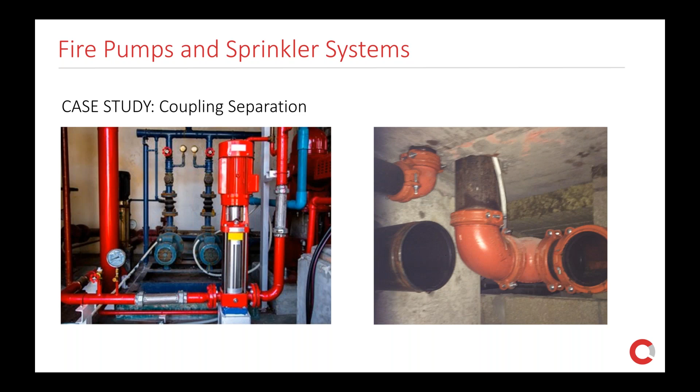So again, as you can see, understanding the fire protection systems, their failure mechanisms, and the standards, the codes, and the best practices gives you a huge advantage when investigating these claims, and it opens a number of potential opportunities when it comes time for you to think about dealing with your claim and subrogation matters.

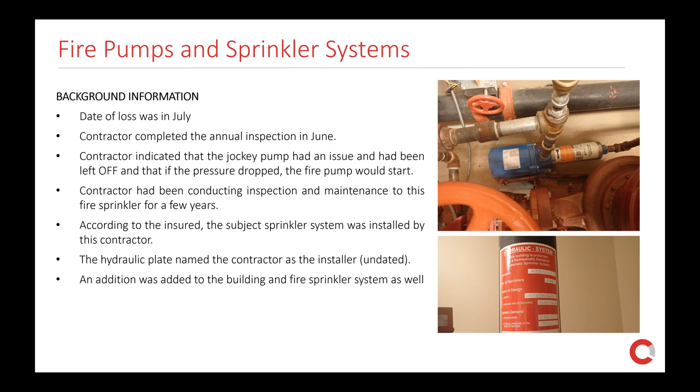And well, the activation of the fire pump in normal circumstances would not be so critical, except, well, in this facility, it was less than acceptable. Well, we know the failure. The failure is the hose separated. We know the root cause, and the root cause is that this hose was not intended, or in our opinion, it was not intended for it.

And we know that this province uses the National Fire Code, and in turn, it refers back to the NFPA standards. So we know the route we need to follow to prove this case. And in this particular one, the standard applicable is NFPA 20. And again, not only applicable at the time of the loss, but at the time of installation, at the time of maintenance. And in this case, it does say that provisions shall be made for this piping or this valve to discharge to a drain.

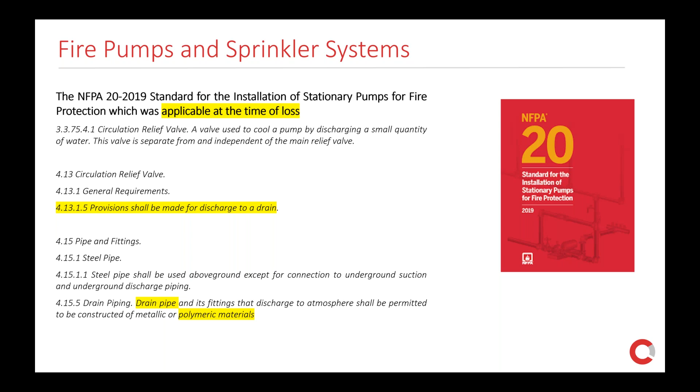Not much detail there, right? A little bit grayish. Then on drain piping, it says that the drain pipe and all its fittings can be metallic or polymer. So we have a little bit of an issue here, right? So maybe that polymeric hose was proper after all. Let's keep digging a little bit.

And we go back to the NFPA 25, which is the standard that governs inspection, testing, and maintenance of these systems. And it tells us that a no-flow test should be done every month in this case, and an annual flow test every year. So we know that this contractor who was doing work there for a few years would have been there at least once a month, and once a month they would have seen this hose moving, because whenever you turn on the pump, the pressure makes it move, and you will see it for sure. It's not such a big room anyways.

One thing I wanted to run by you quickly is that prior to any inspections, I highly recommend that you get a little bit of a know of your basics, your fundamentals, on the failure modes, or what to expect. And if you can, develop a little bit of knowledge on ancillary areas, say what the installation should look like, or what maintenance should have been done.

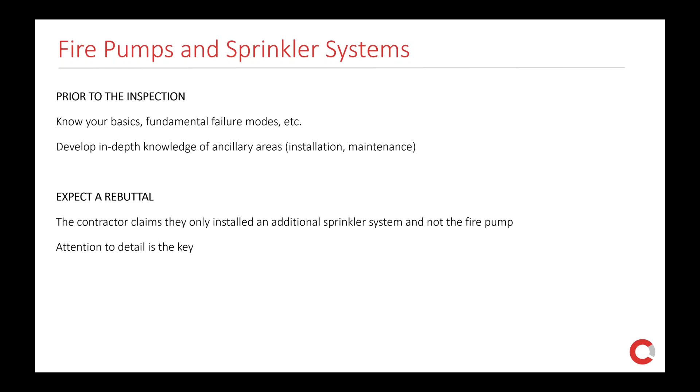And also always expect a rebuttal. I haven't really seen many people come up and say, "Oh yeah, sorry, our bad, we own it." Typically, the other party is gonna say that they've done it properly, they've done it like that for 30 years, or whatever other excuses they can come up with, right? So attention to detail is key whenever dealing with situations like this.

Whenever you look for the definition of pipe, you will find that pipe is a rigid tube. It can be polymer, it can be metal, but it has to be rigid. In this case, the hose used was flexible. More importantly, it was not listed. It was not approved for this application. It was improperly connected, right? I have some of the conclusions and opinions there.

And one of the things to note here is that the contractor ignored the potential for property damage over several years. They would have been there, they would have seen these hoses shaking every time they had to go there on a monthly basis and do the churn test. And obviously, the contractor failed to replace these hoses with an appropriate pipe for this application.

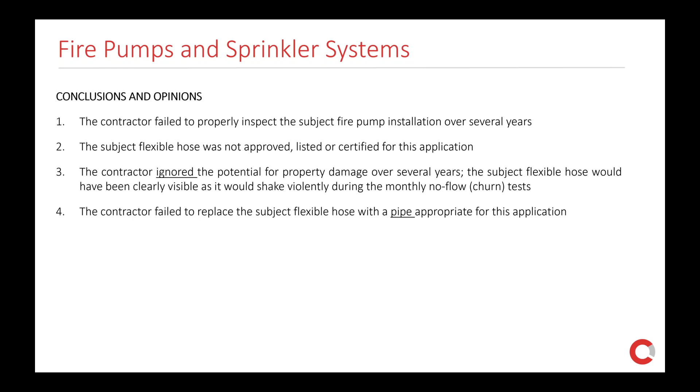And with this, I conclude my presentation, and I'm open for any of your questions.